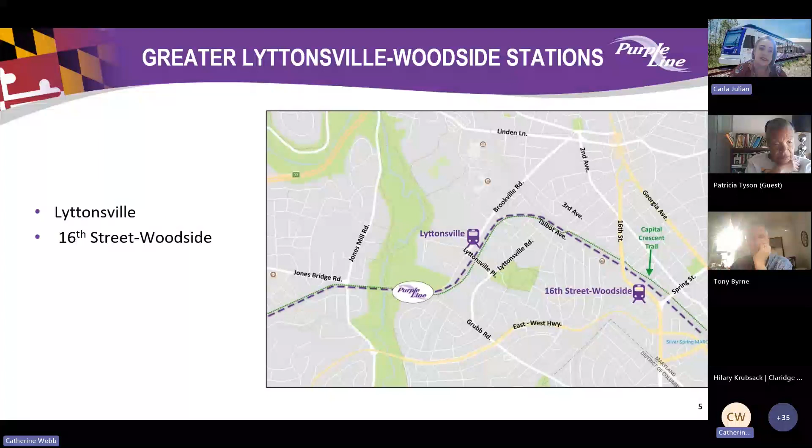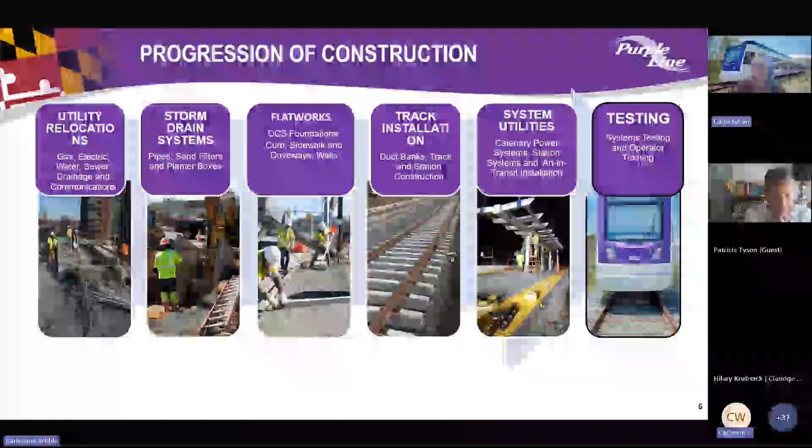To progress construction in all of these areas, there's a lot of different phases going on concurrently, including utility relocation, storm drain system installations, track installation, system utilities, and testing. That all needs to occur at the same time. Within our 16-mile alignment, each segment is in a different phase, and as you may have noticed, a lot of those segments you can start to see our station canopies and track installation, which is exciting.

With that, we're going to go to our next slide, where we're going to show you our spring 2024 progress video, which features our project leadership team.

Seems like we're having some technical difficulty with that video. Ray, would you like to come on, and then we'll get that video situated, and perhaps we'll start with that timeline?

Yes, sounds good. As with anything with construction, we're always ready for anything that may be unexpected. So we'll get back to the video, but I'll just talk about a little bit of things that are going on. You'll see in the video that construction activities have continued to ramp up over the last 18 months over the entire alignment.

In the video, you'll see the Talbot Avenue Bridge. We are excited to officially open that bridge on this Friday, May 24th. Looking forward to seeing you all out there.

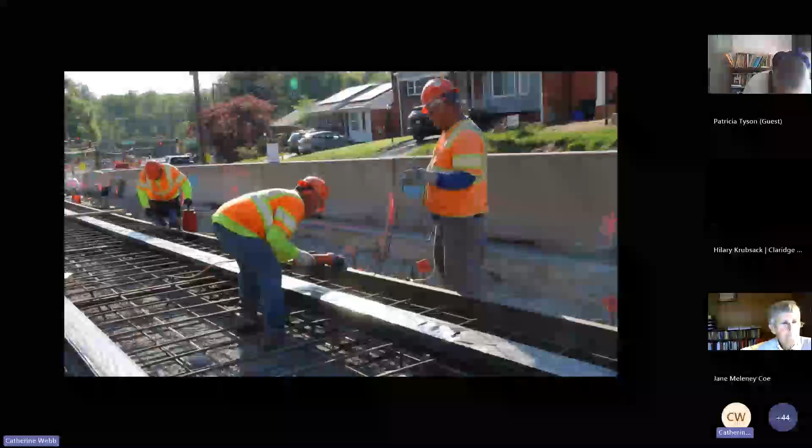Welcome to the latest update on the Purple Line project. This year, we placed thousands of feet of track, an exciting example of tremendous progress being made by Purple Line crews. 2024 is set to be a year of momentum.

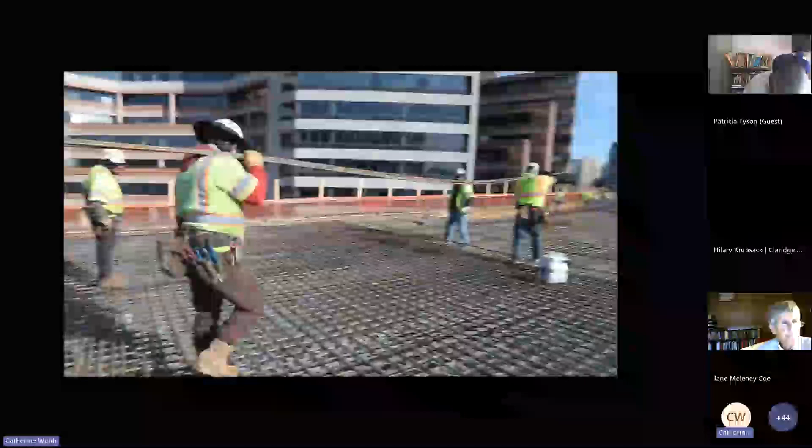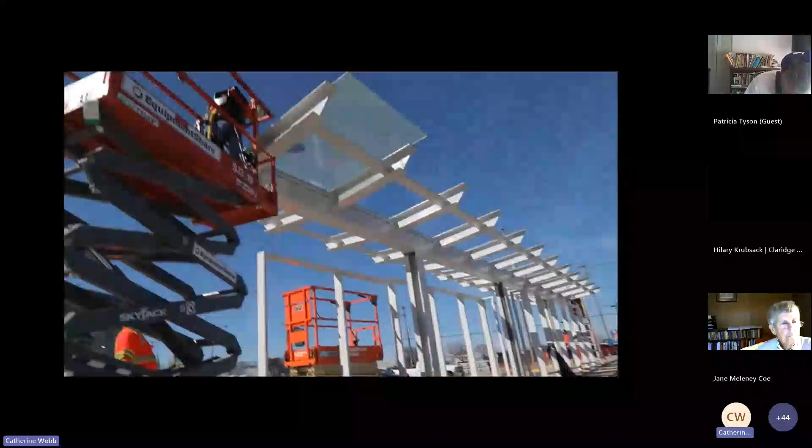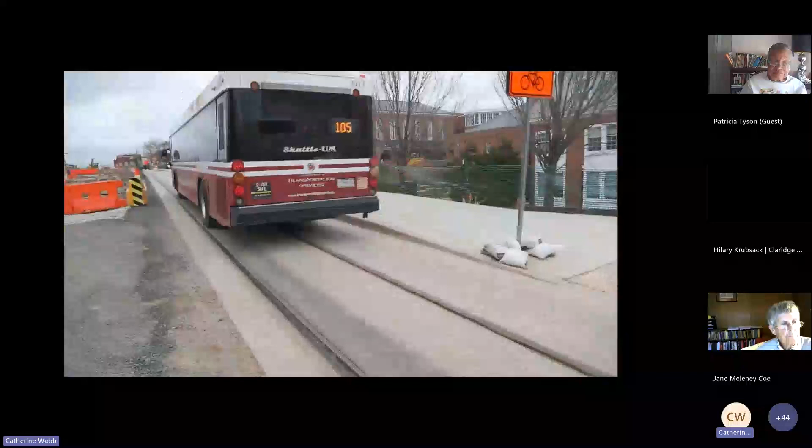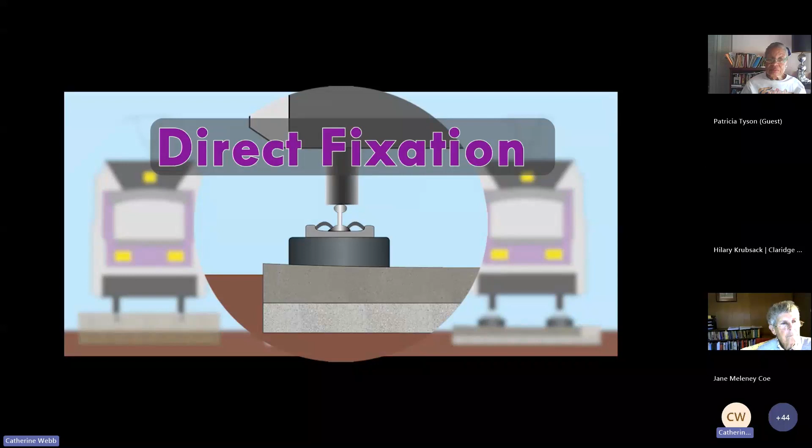The Purple Line track installation teams will be reaching even more areas. Already, tracks have been placed at the southern end of the project, along Ellin Road and Veterans Parkway, and throughout the University of Maryland. The track at Campus Drive is embedded track, seamlessly integrated into the road surface. The Purple Line boasts three main types of track: embedded, ballast track, and direct fixation. Each plays a crucial role in our mission to ensure a smooth journey from New Carrollton to Bethesda.

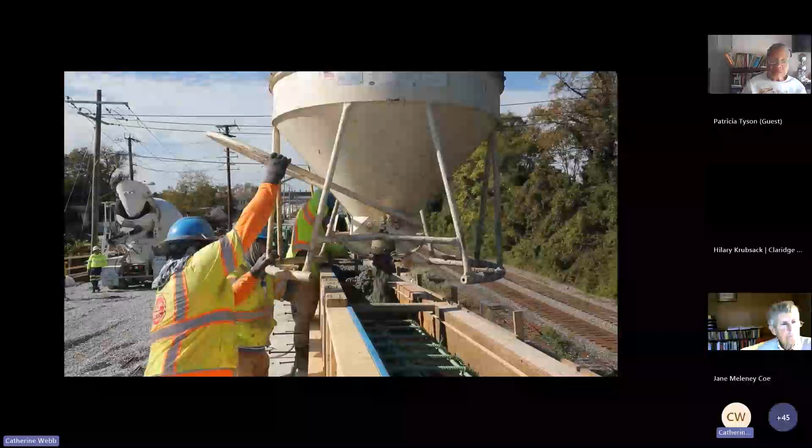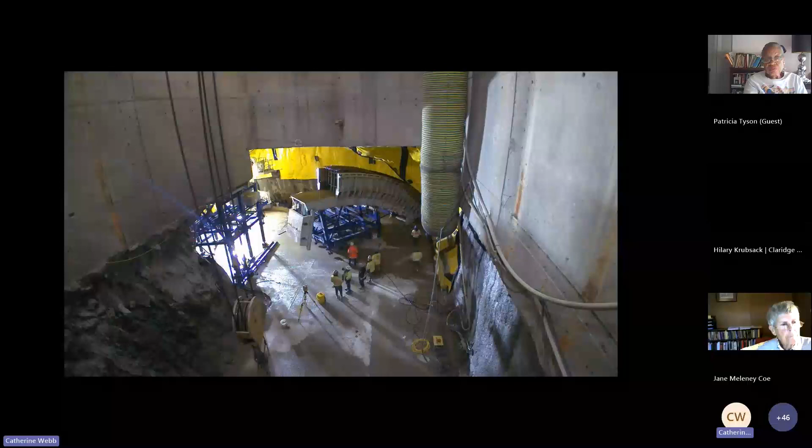Progress is visible along the whole 16-mile alignment. In Bethesda, crews have put the custom-made sprung arch form system to work to cast the first sections of the new cavern ceiling. The cavern will connect the 130-foot deep shaft to Metro's Bethesda station.

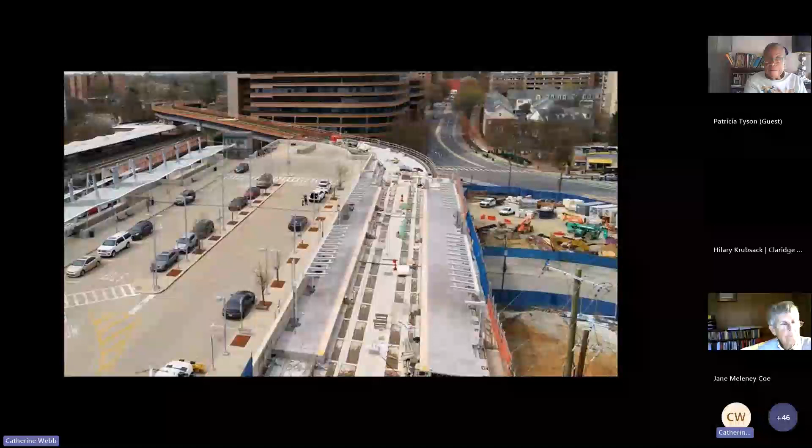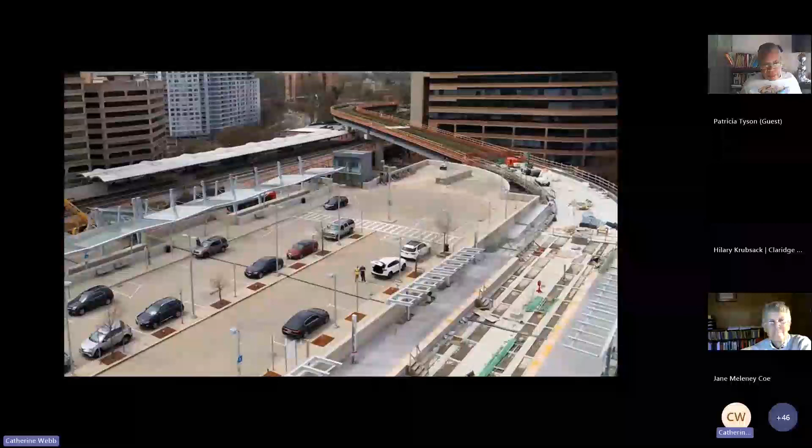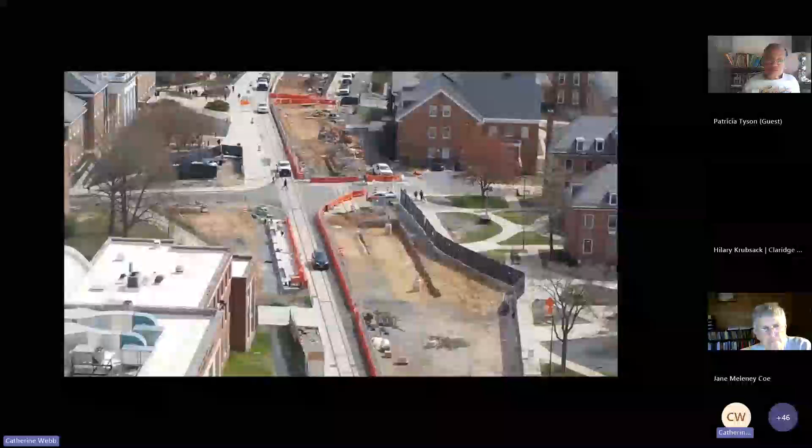In Silver Spring, the new Purple Line station is rapidly taking shape. From the installation of utilities to the erection of canopies, progress is evident at every turn. But Silver Spring is just one of the 14 stations underway. Station platforms are also emerging at key locations like Connecticut Avenue, Lyttonsville, Campus Drive at the University of Maryland, College Park, and Glenridge, among others.

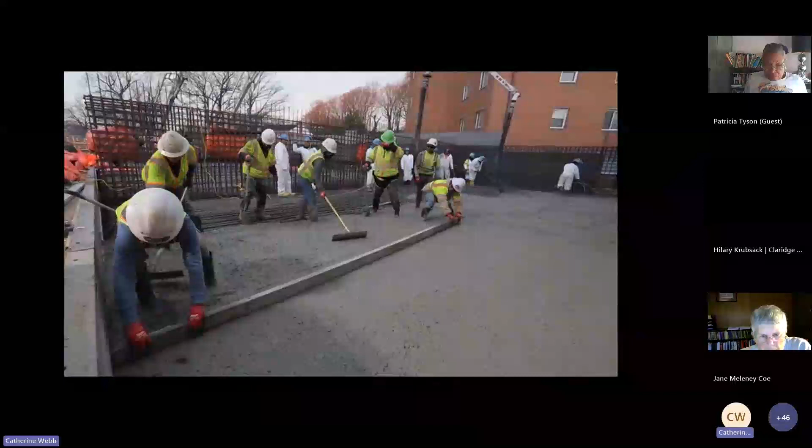In December, crews poured an impressive 720 cubic yards of concrete in one day to form the roof of the tunnel extension between Wayne Avenue and the Manchester Place station.

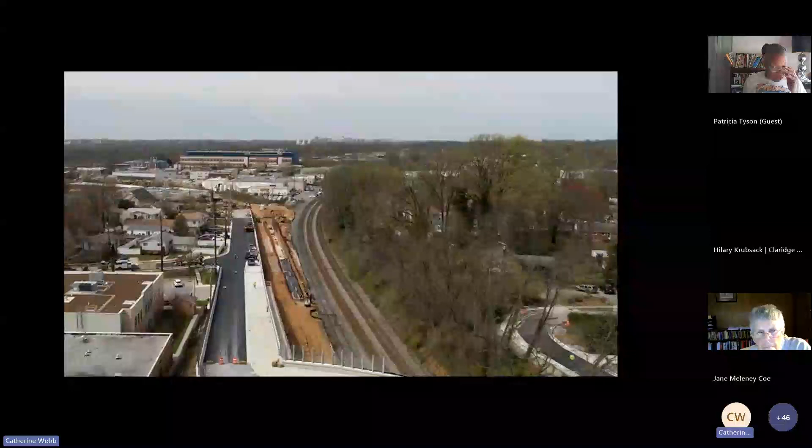We also finished the concrete, fencing, and paving needed to open the new and improved Talbot Avenue Bridge, part of the Capital Crescent Trail and an important connection for the communities of Woodside and Lyttonsville.

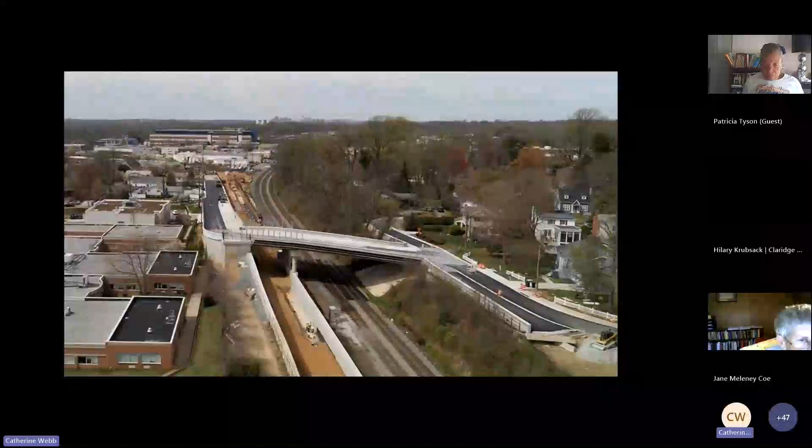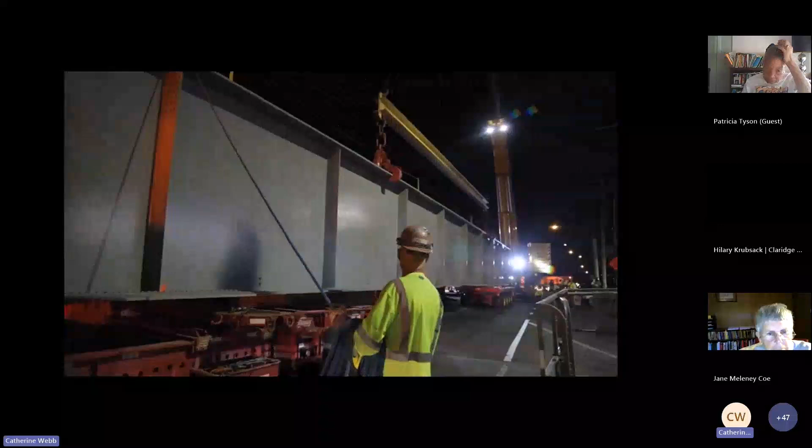In Prince George's County, the Kenilworth East-West Highway Flyover Bridge, made up of over 617 tons of steel, has been installed over this very busy intersection.

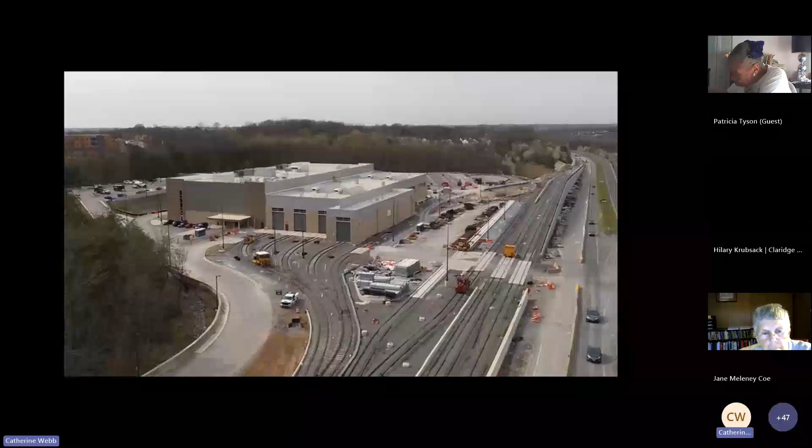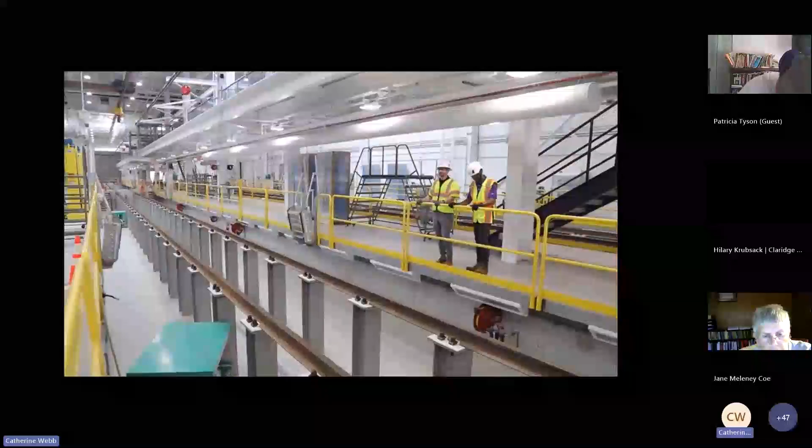In Glenridge, the Operations and Maintenance Facility prepares to be the heart of our operations. Here you'll find a variety of specialty track segments, essential for guiding our light rail vehicles as they navigate through the facility. Inside the OMF, state-of-the-art cranes and meticulously designed workspaces stand ready to handle everything from routine maintenance to major repairs.

While we celebrate these achievements, there is still much work ahead. As you can see, we have more visible tracks, stations taking shape, and complete bridges as a few of the Purple Line's most exciting milestones this year.

This time next year, you can expect to see the Purple Line light rail vehicles begin testing on the new test track located in Prince George's County.

I'm going to start out the discussion about our progress here with a brief educational segment about one of the major elements on the Purple Line, and that is duct bank. You may hear that word used a lot, not only for the Purple Line, but also in the industry. Really, what that is is an underground concrete structure that contains conduits for power and communications cabling.

It protects the cabling, being concrete, from accidentally being struck by other excavations or sometimes other utilities installed beneath them. We have duct bank that runs the entire length of the Purple Line, miles of it, and we also have probably an equivalent footage of duct bank installed to power services and signalized intersections across the project. So duct bank is an unseen but vital element in the construction of the whole project, and one that requires a lot of digging.

With that, I'm going to turn it over to Mike Edelen. He's our segment manager for this area that runs through Lyttonsville, and he can give a great update on the progress they've been making there.

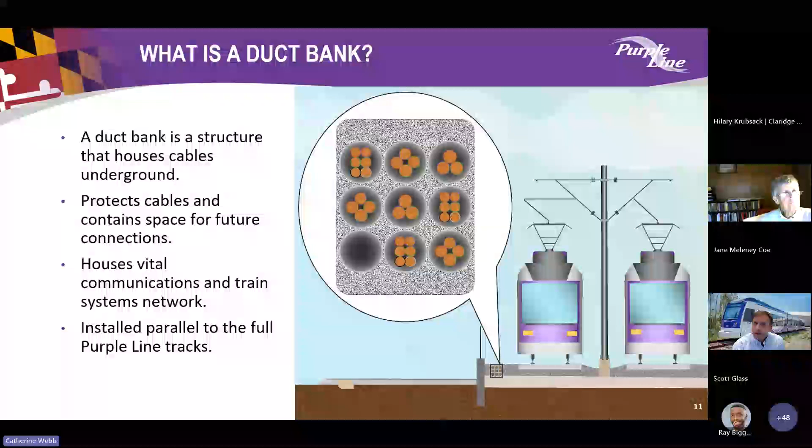At the beginning of this area, mainly starting at Rock Creek Park, we've had a lot of work going on. It's been a struggle with the rain since a lot of this work is inside the creek, but we've been able to remove the old trestle bridge foundation, remove the pier that supports that area, and continue with the bank and stream restoration.

We completed one side quite a bit ago, and now we're on the other side, wrapping up. The aim is to open the trail back up as soon as possible, with this Friday as the goal. Then we'll be moving on into some of the trail connection work in the future. Next slide.

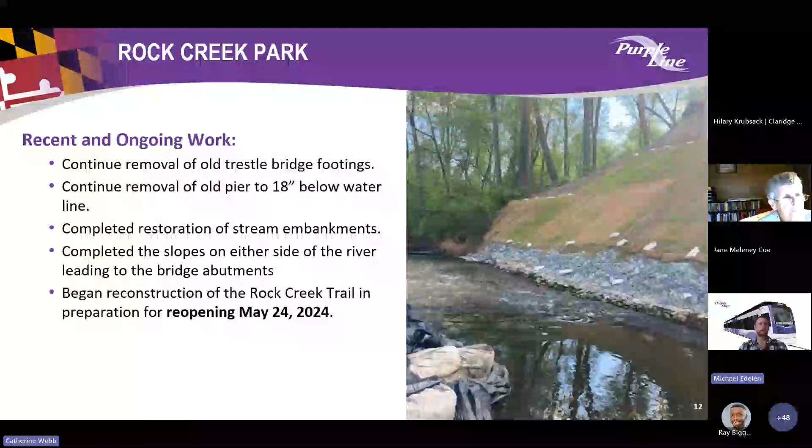Up in Lyttonsville Yard, this is kind of the twin facility to the Glenridge Yard, a smaller facility, but there is quite a bit of additional track work and infrastructure related to maintenance of the future LRVs.

In that area, we've been continuing with retaining wall construction. We've been doing some parapet work on Lyttonsville Bridge, which we did over the summer. We started work on the traction power substation and a couple of the stormwater maintenance management facilities. There are 3 or 4 in this area, and 2 of them are underway as we speak.

Upcoming, we'll be continuing with the traction power substation, working towards starting track work in this area in the next couple months, and then finishing up some of the other items that were partially completed, like the OCS foundations and the stormwater maintenance facilities, and finally getting into the construction of the maintenance building itself. Next slide.

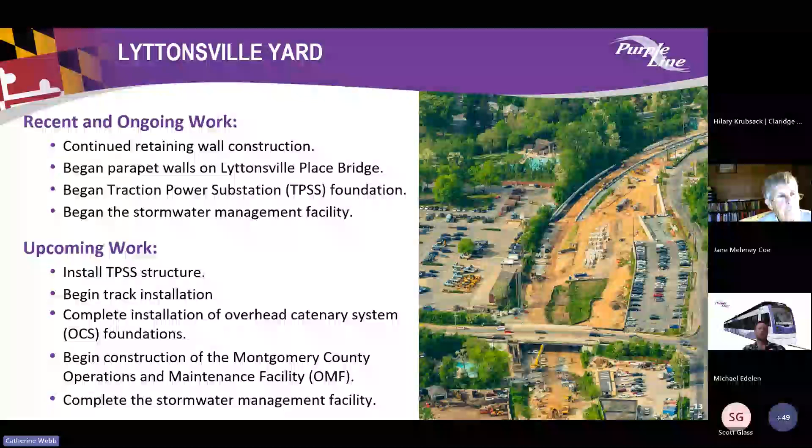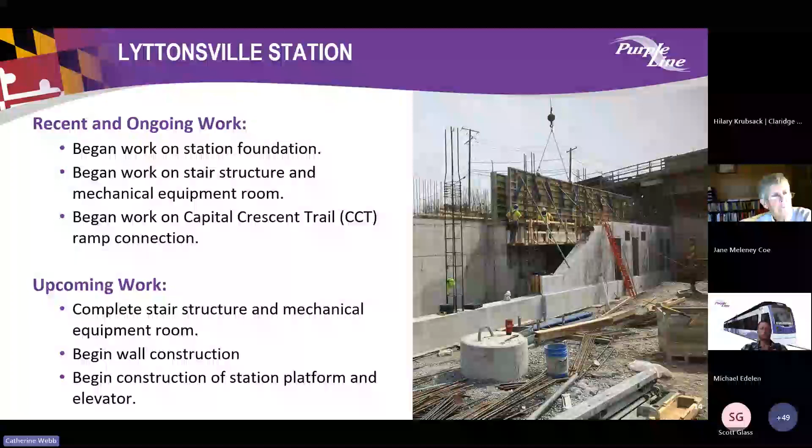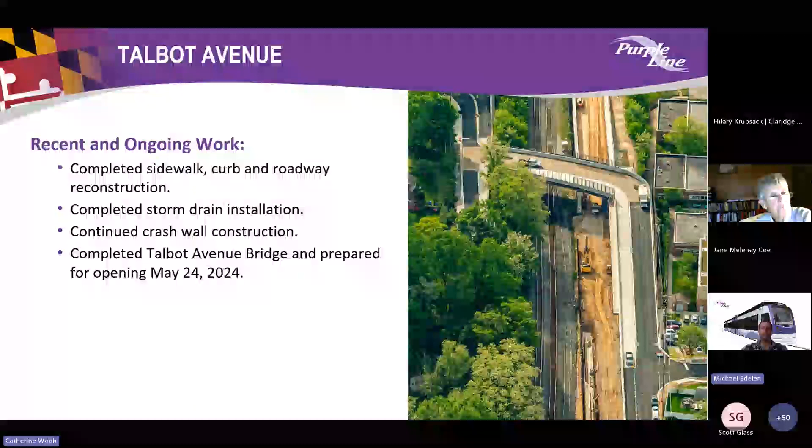In addition to the crash walls, we've had some storm drain installation down on the alignment, getting the area between Talbot Avenue and the CSX right-of-way ready for track installation. Coming up, you'll be seeing the OCS foundations going in and then grading for the track work, and also the landscaping. We did start some of the landscaping along the houses, but there'll be more landscaping coming up this summer and fall to really move these areas into final completion status.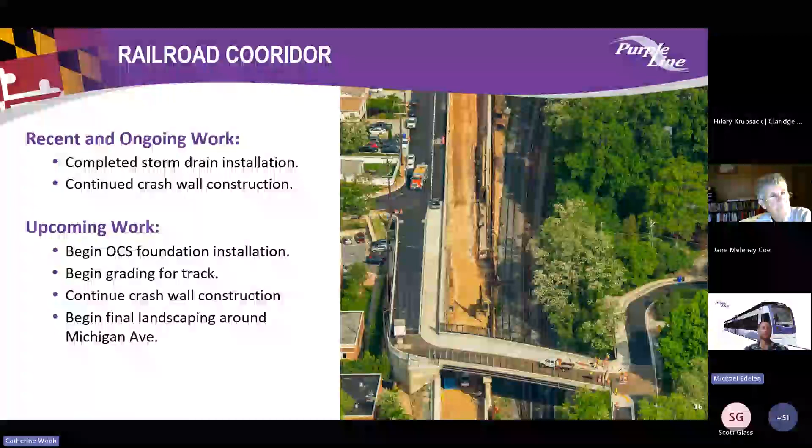One more thing in this area, the Rosemary Hills School. We did finish the parking lot stairway. There's another, final version that still has to be completed, but that will be coming up this summer — the final landscaping and the fencing along the top of the retaining walls. A lot of the fencing is completed now, but there's some more that's going to be going in.

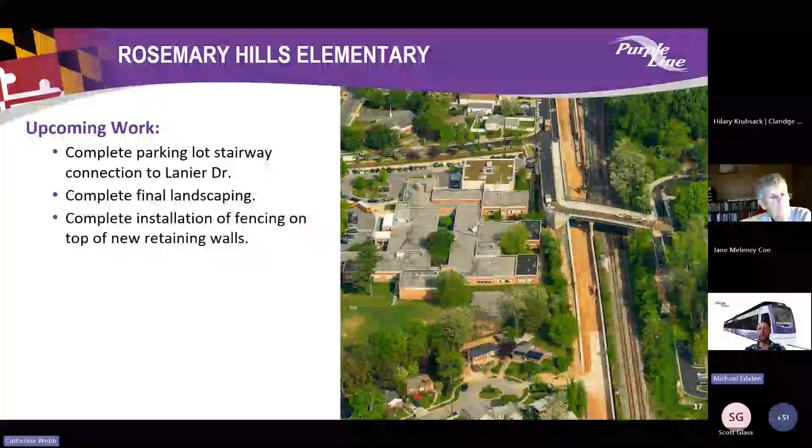The next major area, and a lot of this has been escalating lately as far as the amount of work going on, is the 16th Street station, between the 16th Street Bridge and Spring Street. There's been a lot of storm drain installation, excavation for retaining walls, and getting ready to do the storm drain jacking bore. There's a water and sewer jacking bore that were completed previously, but we're gearing up now for the final operation with the storm drain.

In addition to that, we have the work between Talbot Avenue and Colesville Road. There's another retaining wall down behind the apartments there, and that work has been a lot of preparation, but the structure of the wall will be starting pretty soon. And the Capital Crescent Trail work on the other side of CSX — we moved some equipment in there over by Ballard Avenue this past week, getting into some of that brush clearing and getting the Capital Crescent Trail completed so that we can do the final landscaping in that area as well.

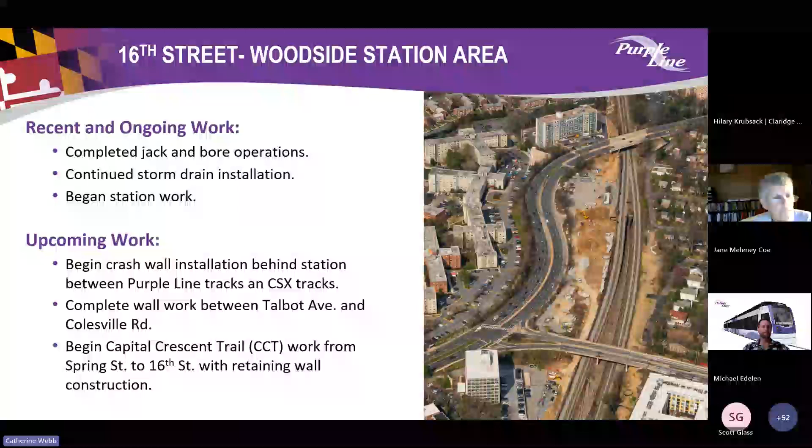Kind of the final section of work here is the Spring Street Bridge. There's been a lot of preparation, getting ready for the summer anticipation of doing the Spring Street demolition and rebuild this summer, the underground utilities, and then the site preparation. With that being only a couple weeks away, the major upcoming work there is the closure of the Spring Street Bridge from a traffic standpoint, and then getting into the rest of the utility relocations, demolition, and bridge reconstruction.

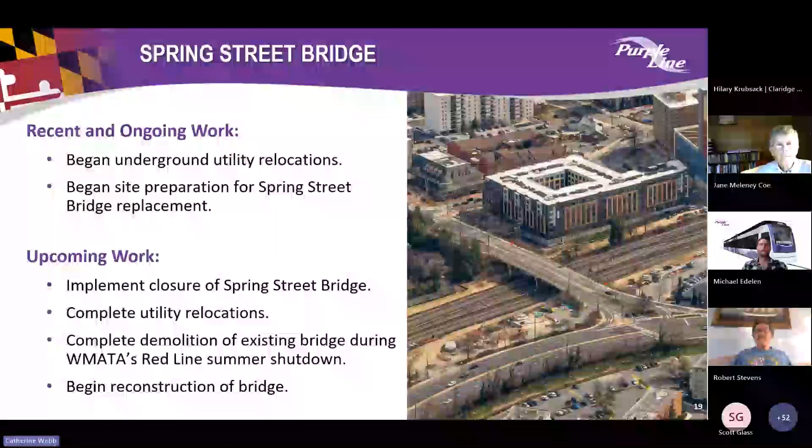Not sure who I'm handing this back to, Ray or Scott. Is there another video you guys are playing? Yeah, appreciate it. We'll please get the safety video playing now.

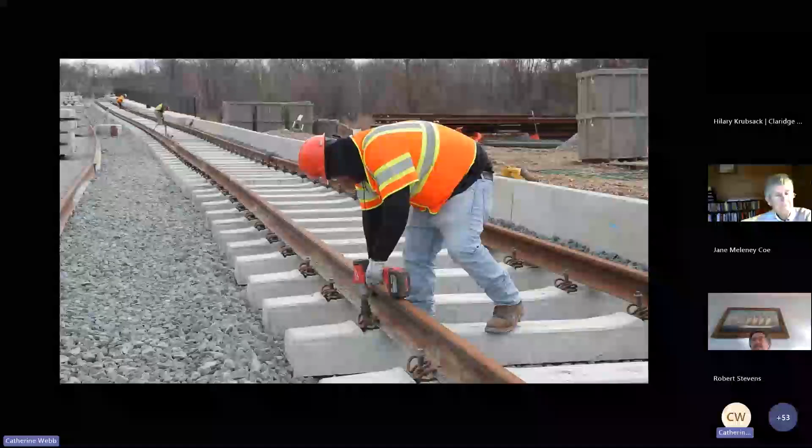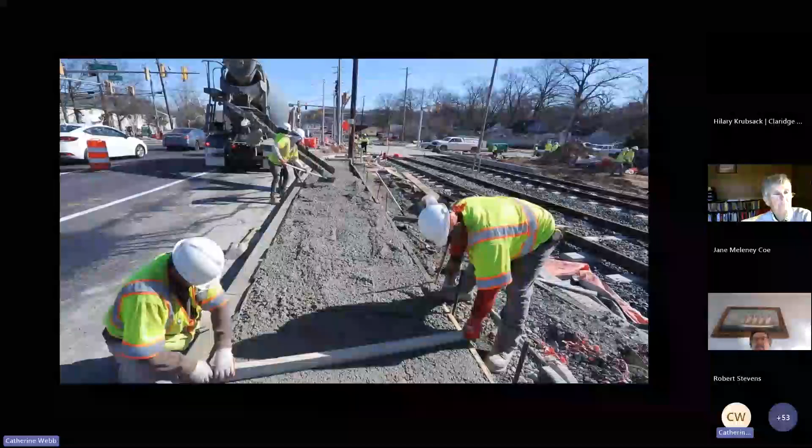Safety is our number one priority, both for our crews building the Purple Line and for the public. As we shift into track installation, you will see more and more work in the roadways and crews implementing lane shifts and detours. This could also include pedestrian walkways. So please take your time and follow all the posted signage, and if you see something amiss, please call our hotline.

Well, we are getting towards the end of our presentation tonight, but let's first talk a little bit about community engagement.

As Ray mentioned at the beginning, we are inviting all of you to join us, the whole Purple Line team, as we celebrate the opening of the new Talbot Avenue Bridge Friday, May 24th at 10 a.m. That's this Friday. I know several of you on the call in particular have been involved for many, many years, and we are really excited. Appreciate all your support and patience as we finish it, and we're excited to open this bridge to the community and take a moment to celebrate the progress that we're very proud of here on the Purple Line.

This is a year of momentum, as Ray said. And after the event, the bridge will remain open for public use. So excited to have that bridge open.

One more reminder for the Beyond the Rails Community Grant Program. The Purple Line team is so fortunate to be part of this community, and we take that responsibility seriously. So tonight, we wanted to take the opportunity to advertise our Beyond the Rails Community Grant Program. This program is aimed at supporting existing nonprofit groups by amplifying the great work that they're already doing in the community by providing additional funding. Our first round of 6 community grants were awarded earlier this year and were a huge success. And so the next round will be due at the end of this month, May 31st, 2024.

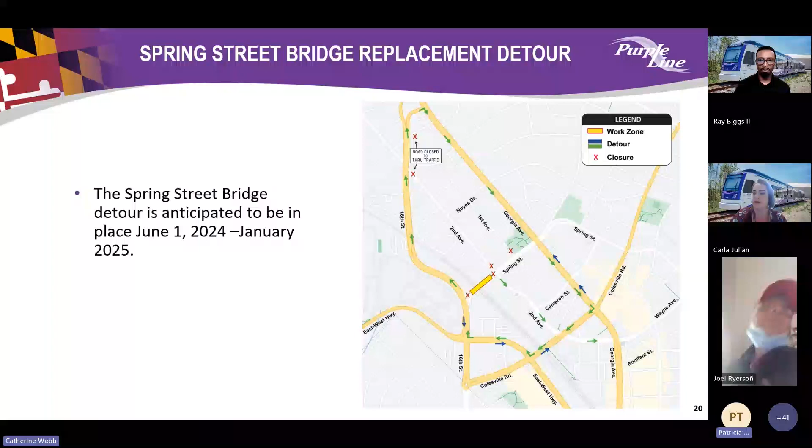And there was another one - right there where Lanier starts from Talbot Avenue, there was a community sign identifying Lyttonsville, saying 'Lyttonsville 1853.' That had to be taken down. I asked someone we talked to when we were looking at that area if it would be put back up, and I was told it wouldn't, because it was a wooden sign and that's all concrete now. So I wanted to know if a metal sign denoting that you're entering Lyttonsville could be placed there, since it's all cemented over.

Yeah, I think Carla or Ray will have to follow up and look closer into that location. Kat, let us circle back with you on that.

Okay, thank you. My last question is, when the bridge opening occurs on Friday, which side are we supposed to be on for the opening - the 4th Avenue side or the Talbot Avenue side to cross?

We might need to follow up with you after this, Pat, and give you a call directly to make sure. Okay, thank you - I believe it's the 4th Avenue side, Carla. I was just checking to make sure, since I saw something in the beginning that said 4th Avenue. We wanted to be able to tell people who were parking - we know they can't park in the school lot or the church. I'll be in my car, but I wanted to make some suggestions for whoever is coming a distance and driving.